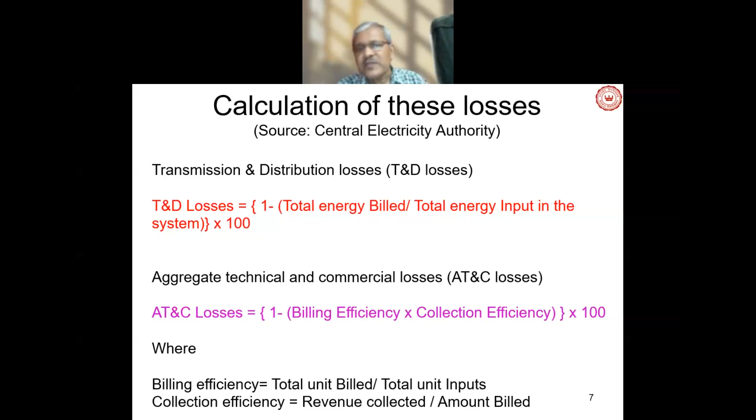That planning has to be done according to the industrial growth and many other issues over the 5-year plans. But interestingly, the source of power, fuel, is somewhere in the eastern part, southern part or central part, and the largest consumptions are in the western and northern part. You have to transport the fuel, and there lies another problem or difficulty.

Almost 45% of the overall freight movement of the Indian railway is due to coal transportation. So we are consuming some part of our own energy for the transport of energy itself. Is it not a fallacy? We have to accept it, because if our consumption point and generation point, or rather extraction point of coal, would be very close, that's a theoretical proposition. We academicians always go for good assumptions, but that may not be the reality.

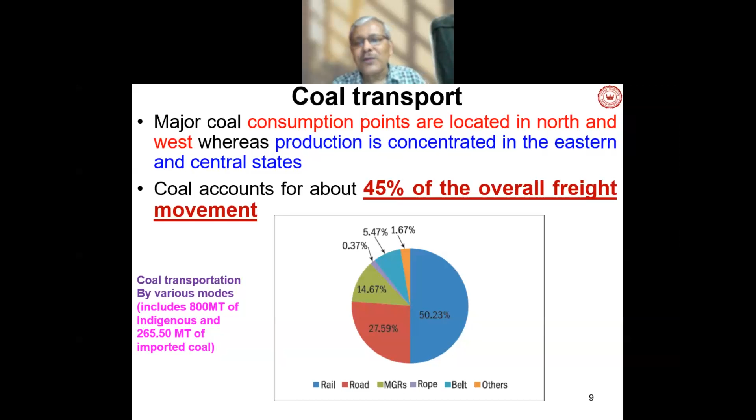Anyway, so we have to transport the fuel, meaning with respect to energy efficiency we're also losing it, but no option, because already installed large plants are on the western side. And that effect I will show in my published paper when I refer to the eastern part: though they are producing maximum resource fuel for power generation, they are the largest deficit with respect to power supply. Anyway, that's with respect to national planning and many other socio-political issues. I'm not going into those issues because those may be the research of socio-political scientists.

Then we have a bootstrap problem. We initially made our infrastructure towards coal-based power just because we had, or rather we have, large coal reserves. We are within the first 4 to 5 countries. Last time it was 4th, most probably currently it is the 5th largest country of coal reserve with respect to known coal reserve. So some more new mines may come up.

But interestingly, though we started our entire power sector dominated by coal, later on we found out that this coal is poor quality coal with respect to high ash content. So with respect to business, especially the private sector, they prefer better coal for better efficiency, for better profit, etc. So what happened? Then obviously people started importing coal. So we started just because we have large inventory, then we opted for importing.

That was not that much of a problem initially, but later on it was identified as a source of carbon emissions. We are being identified for imported coal also. The coal has been imported from Australia or Indonesia or South Africa, but the generation point of carbon dioxide will be responsible for the CO2 emission as per the climate change regulation. So we are emitting more carbon, not only from our own resources, but also from the imported coal.

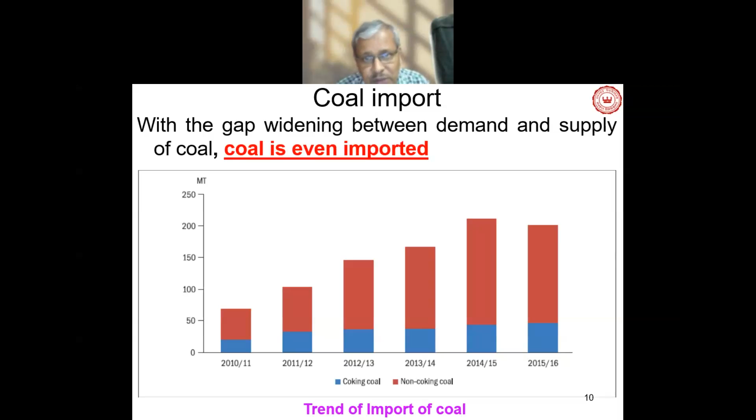Many people may argue that these data are to some extent synthetic in a sense. Unless we can reach the demand of the entire country, every person, we are still not providing electricity to everybody, though several projects or other policy planning has been met. I will refer to those also. So this data, whatever has been provided, is it the actual real data?

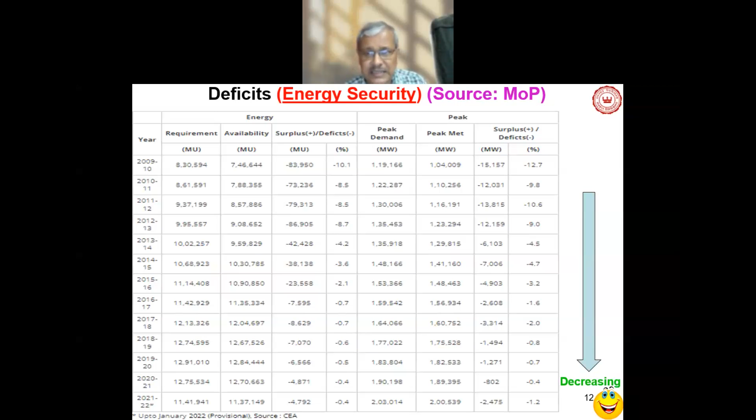I'm not going into that controversy, but I'm accepting it, as this is government published data, as a general tendency of decreasing deficiency, both with respect to peak load and the overall integrated energy deficiency. But interestingly, we have to note that this particular deficit, if your electricity connections increase, will really be much more than the declared one.

Now, government initiatives. Problems will always be there, and we have a general tendency to criticize the government because we are not getting anything, so the government is responsible. But the government has to take initiatives, which are very difficult to implement in a situation, but the government has to try. That's their responsibility. That's why they are in the government. So some of the government initiatives I'm referring to.

The Electricity Act in 2003 was a very remarkable development with respect to pure accounting of electricity consumption, and the Electricity Act in fact very clearly told about the unauthorized use of electricity, punishment, etc. And it also gave importance to rural electrification.

Rural electrification policy was adopted in 2006, though it committed provision of electricity to all households by 2009. Honestly speaking, in reality, it may not be the situation. Rajiv Gandhi Gramin Vidyutikaran Yojana, this was also to supply power to below poverty line households. We must admit these because these are the officially announced programs of the Government of India.

Then the remote village electrification program is another very important concept. India is quite lucky to have a wide variety of topography. We have Himalayan hills, we have a long coastal area, we have different other places, and we have the deserts. So everywhere the grid-based power may not be equally good or rather viable with respect to revenue generation.

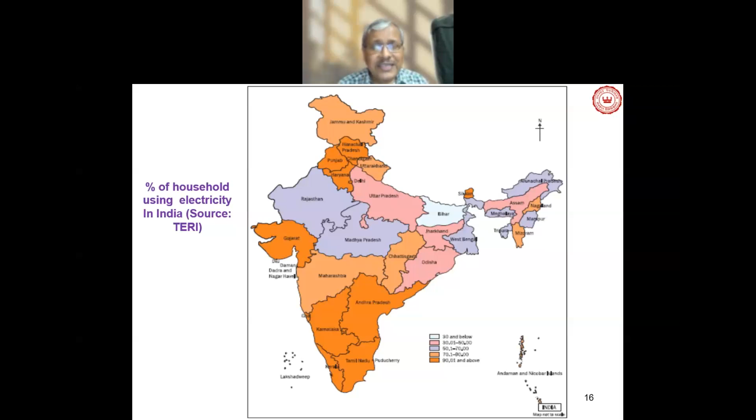So this is the scenario from census data: though a lot of initiatives have been taken, even 30% and below connections are there in some states like Bihar. And the better states are either in the southern part, or in the central part around the capital Delhi, and in Gujarat. So we have certain problems with power accessibility for all the population.

So I'm summing up whatever I have discussed about the policy issues. Large-scale power generation will be coal-based. Though my presentation title tells something different, I must admit there is no other option for the immediate future, even for a longer period. We have to compromise with our possible solutions in a realistic way. However, national policy also aims to provide electricity to villages, specifically to poor villages.

Let's see how it can be done. And for villages of India, my question is, not that it's an adopted policy of the government, whether small-scale decentralized power and other energy utilities using local resources would be suitable. What my proposition is, is something like this.

Whenever you are talking about coal-based power, coal is available in certain places only, in mines. And as I have shown in my previous slide, coal transportation becomes a big issue with respect to overall energy efficiency. So obviously, if we can explore local resources where power generation is possible, then we can meet the local demand with local resources, and the energy transportation issue will become minimal, or rather zero.

So my suggestion is, can we explore whether small-scale decentralized power and other energy utilities using local resources would be suitable? Let's see. Then another issue has come up at the international level, globally. Climate change has changed the entire aspect of human activities. Initially, people were suspicious whether climate change was a hoax or not. But now the entire world community accepts that it's a serious challenge. You have to address that. If not in the form of mitigation, we have to address it in the form of adaptation.

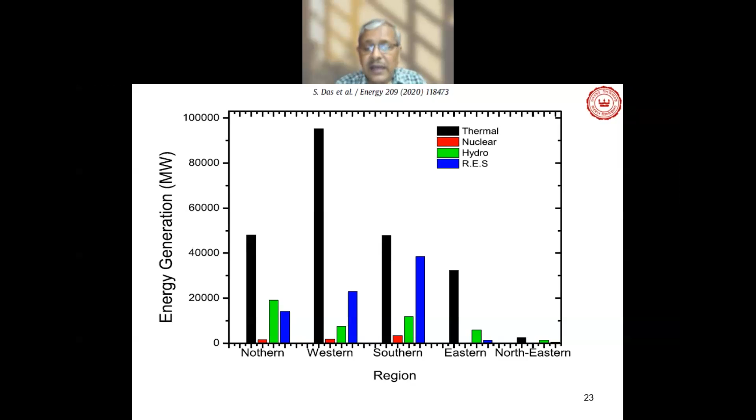Because grid power will not be feasible; it is already proved that maintaining grid supply in such high mountain terrain may not be practically feasible. What I got from the study is that in the northern, western, and southern regions, specifically the western part, electricity supply availability is much higher than in the northeastern region, where it is almost non-visible.

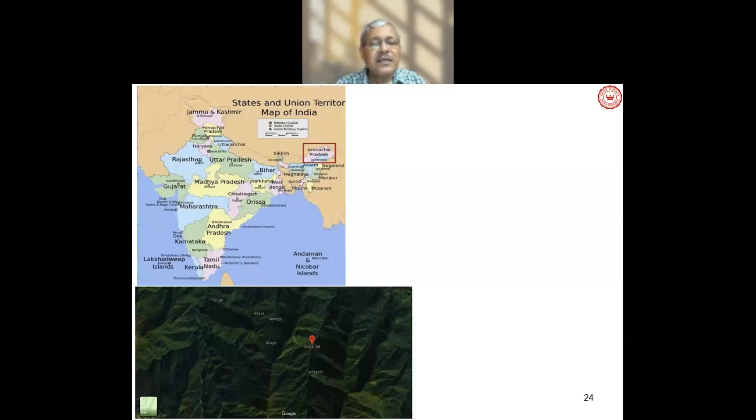So we have concentrated our study with respect to Arunachal Pradesh. The location is something like this. In fact, in our paper, the reviewer demanded a little bit of the geographical, physical view of that particular place. And this is a part of our paper.

And if this is the situation, how can the grid power be integrated for these areas? So our only option is if we can make something of distributed generation using the local resources. Now, what was the strategy? It was something like this. Let's assess the local demand. How much is the demand? In any electricity planning, even for large scale power generation, you have to have the assessment of the demand initially. Then we make the resource evaluation.

The resource evaluation, in fact, is not that important with respect to large coal-based power, because you can supply coal from your available reserves. But for distributed generation, matching these two is very much important. Then the selection of the equipment, available equipment matching local resources, is important. A single renewable resource would be, in a sense, easy to operate, but most vulnerable also, because if that resource goes, everything goes. For example, if it is a solar-based system, then battery capacity will determine the maximum possible availability of power. Similarly, a combination of renewable resources, which we call hybridization, is a good option.

But combination means which combination? Multiple options may be available. Here goes engineering optimization. So occasional diesel generator support may meet the load, as was checked. It is good, because generally people have a perception that we should not go for any fossil fuel based system. Don't be that much puritan, at least our experience says. If a fossil fuel based system is operated during 1% of the time to make the power supply uninterrupted, that's better than not using it and having an interrupted power supply.

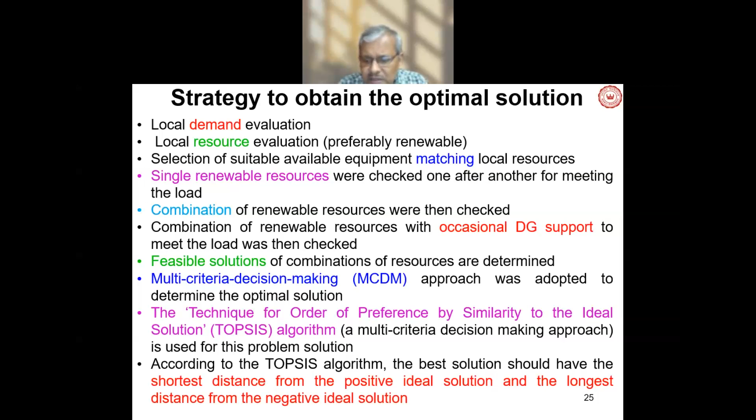Any optimization means you have to decide what optimization tool you will use. We use a multi-criteria decision-making system, and the TOPSIS algorithm of that MCDM system has been adopted. In the TOPSIS algorithm, the basic principle is the shortest and the longest distance, etc. I will not enter into those issues because that will complicate the situation for a mixed audience.

This was the structure for that location in the northeastern states. There are certain PV modules and a battery bank; they operate in a DC bus system, and there is an AC, alternating current, system also, with a diesel generator set, hydro module and wind module. Remember, this hydro module is the micro hydro module with respect to those streams that pass over the hills. It's not large scale hydropower. And then we have the electrical load we supply, and in between there must be a converter, DC to AC conversion. So our objective in this work was to meet the load at the lowest cost and minimum CO2 emission for the full life period. So we have to choose the suitable combinations out of this.

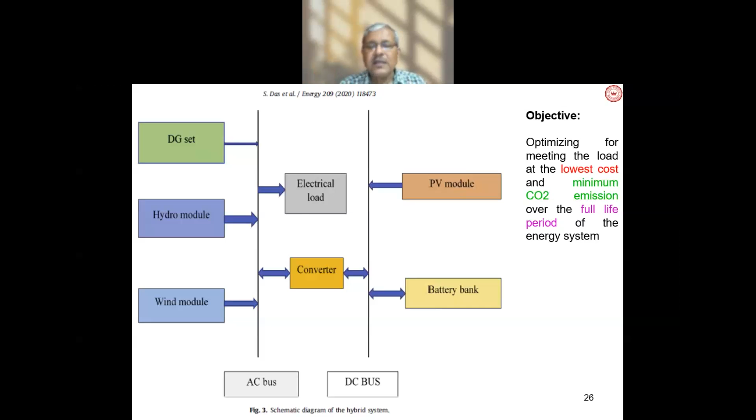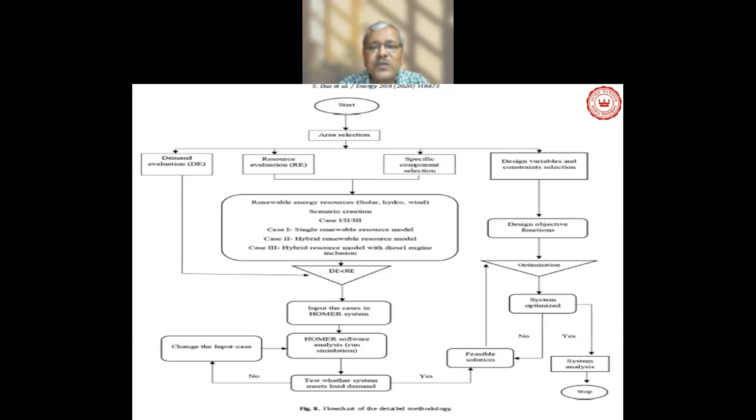Now in the result, I'm not going into the details. This is the logic or the algorithm of how we reached the solution. But the paper has been referred; those who are interested, specifically the students, can find it from my Google list. Anyway, I'm just showing the final result: the power share of the different modules is something like this in the optimized solution.

Almost 57% is from hydro, almost 41% is from wind, and only 1.94% is diesel generator supply. We recommended this as the best possible, or rather I should not call it best, the optimum possible solution. Because rather than giving interrupted power supply, it's better to push this almost 2% diesel generator based system, which is actually existing right now as a 100% system, and go for the other alternative hybridizations of renewable resources.

So cost share is interestingly not necessarily linearly related, because renewable technologies have a wide variety of methods of harvesting power. So what happens when you go for wind based technology? That costing is a little bit less than the hydro installation. So though 41.17% in the optimized solution came from wind, wind is taking lesser costing also, but these two may not always go together. That means if a certain power supply has the largest share, it may not always account for the maximum amount of investment or costing requirement.

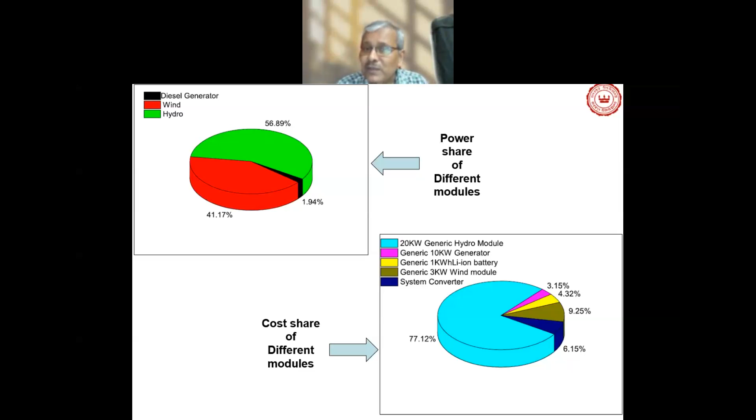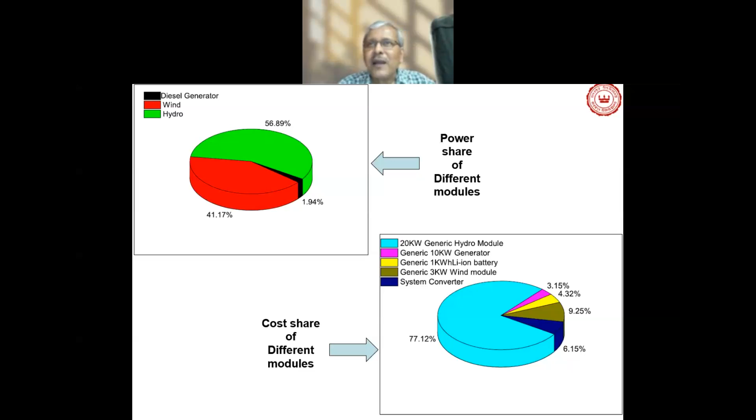There are very interesting challenges in renewable introduction. We are all looking for renewable energy, but renewable energies are much more variable issues rather than the central coal-based monolithic problem. I'm saying monolithic, and this is multidimensional. Because renewable itself is a widely varying thing, whether it is biomass, solar, wind or wave energy. Everything has its special significance, but they are clubbed together as renewable because they are virtually inexhaustible.

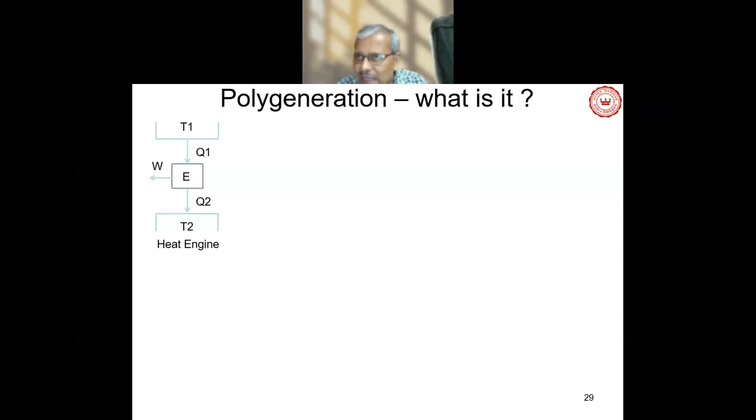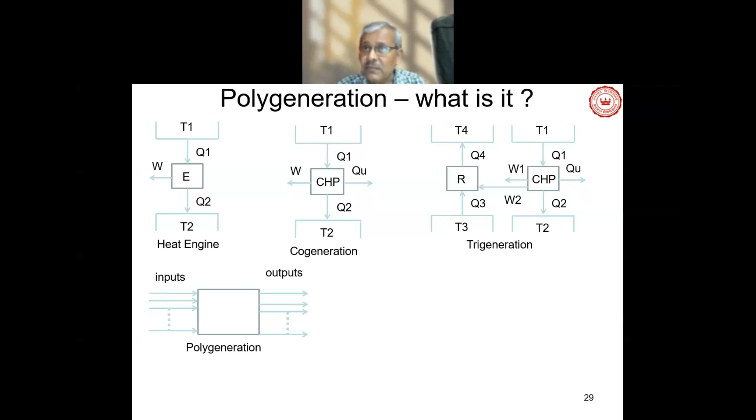Now I'm coming to a new concept which is called polygeneration. Mostly we are mechanical engineers in this audience, so we know heat engines thermodynamically. We know cogeneration, where the additional utility is utility heat. Then we know trigeneration, the next generation, where the heat-based refrigeration system is also used. Now, inputs will be given in a system to generate multiple outputs simultaneously. So here the greatest challenge is the system integration in an efficient way. And this makes the complex system, but undoubtedly this gives better efficiency and much better solutions meeting many challenges.

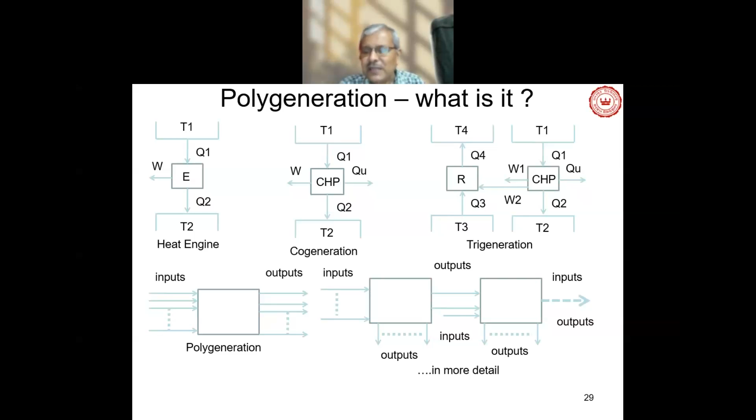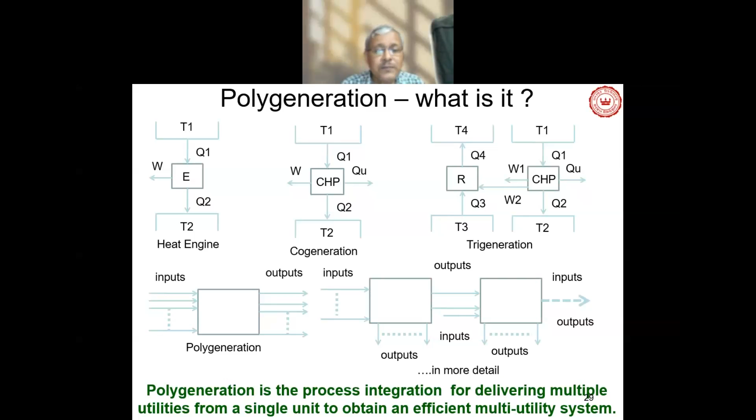It can even be a multi-stage polygeneration system where one block may have certain outputs and some outputs may be used internally for going into another level of polygeneration where outputs will again be of several types. So integrating many inputs and many outputs in a single integrated energy system is a difficult challenge, and that is most probably coming up in future, according to our experience, as a big solution for decentralized systems, which will be a multi-utility system efficiently integrated.

So why is it gaining significance? Obviously, it is efficient. Better utilization of natural resources can be made. Better production security, input flexibility, etc. But the challenge is mainly that the research needs are with respect to the identification of proper local needs and local resources. Because unless you have these two proper assessments, you cannot make a match. And any polygeneration system development is basically a site-specific solution and needs individual attention.

Because a coal-based power plant, when we were talking about the centralized development of coal-based power plants, can be done wherever. It can be uniformly applied everywhere. But for polygeneration development, the issue is you have to make an innovative solution based on the local resources available and also the local demand.

So we are just presenting only the title and this small result and conclusion, not the in-between method. This was one assessment done in West Bengal; as all of you know, Bardhaman district is famous for rice production. So agricultural waste has become a serious issue. Now, out of this rice production, if the agricultural waste, rice straw, can be utilized, we made a study.

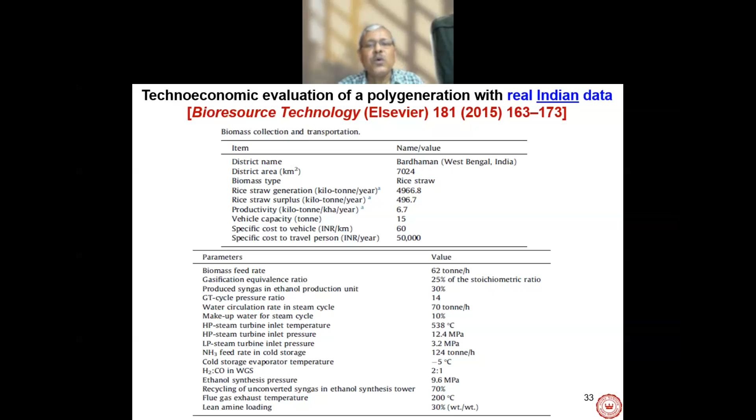It was published, but it's a theoretical study, no doubt. There are a lot of issues involved when you go for actual technology implementation. But this theoretical study has to be the starting point. And it's quite reliable, and the result shows that it's feasible. It's not a completely unfeasible situation. So we have estimated like this. And finally, we have taken care of all the process logistics.

The process logistics become very important when you want to make biomass-based systems. Because when it's a fossil fuel-based system, the calorific value is so high and it is extracted at a central point, so transportation of that fuel is enough. But in process logistics, biomass is actually a distributed generation system. Biomass is not available in a mine. It is available at different points of source. You have to collect them, process them, then use them.

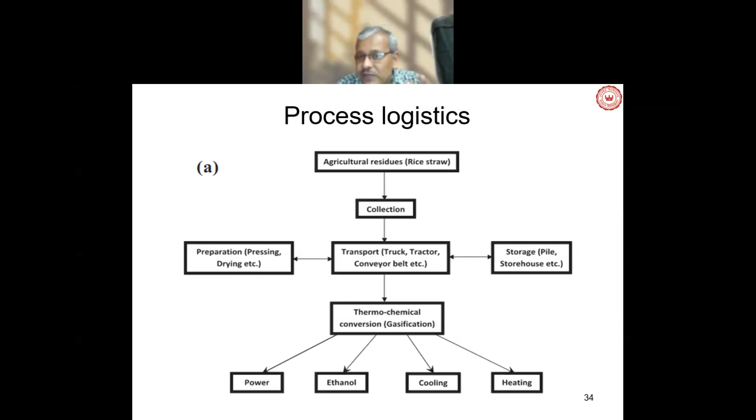So the process logistics has been taken care of, along with the thermochemical utilities. Why it is polygeneration: power, ethanol, cooling and heating. These four were the outputs of that system. Details are there in the published paper. So we have got an estimate of these values. We can have a net power output of 33.5 megawatt. The steam turbine power output is something like that.

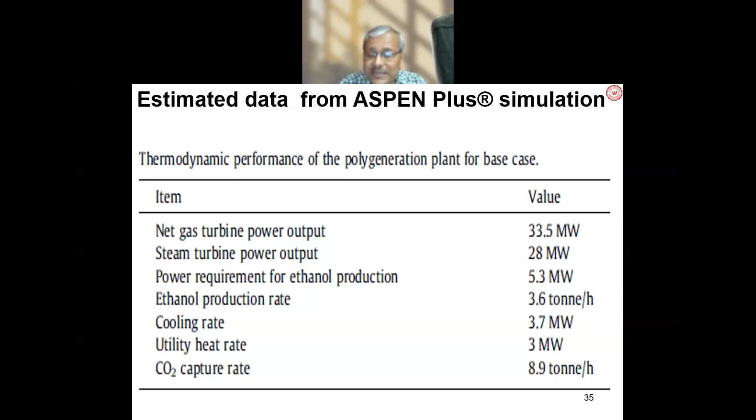We have got the ethanol production rate; it can be used for multiple purposes. It can even be used as a good fuel. Then the cooling rate is something like this. And the CO2 capture rate is also assessed. All the details are in the published paper. In another paper, we have tried to, I will not discuss this due to lack of time, but I'm just mentioning that techno-economic analysis is an important issue because, vis-a-vis the technical feasibility, unless the economic feasibility is there, the system is not acceptable.

On the viewpoint of that, that was also studied, and an off-grid Indian village has been studied for this. And then in the next step, what we have done is an important issue. You know, system feasibility is now considered with a lot of importance. During our student days, it was not that much important. Environmental feasibility. Now environmental feasibility has become a very important issue for any project approval.

And in that case, the indicator for environmental feasibility that is internationally accepted is the life cycle assessment, which takes care of the environmental impact from initial inception to after disposal. We call it from cradle to grave. So whatever impact that particular system has on the environment is assessed in an integrated way. There are different standard methods now. ISO 14040 is the particular document by which the environmental impact assessment can be done.

We have carried out the rigorous assessment and found out all the possible associated issues, acidification potential, climate change potential, and other issues also, and then found out the contributions of each in detail for that particular biomass-based system. And then we have found out the effectiveness of the polygeneration.

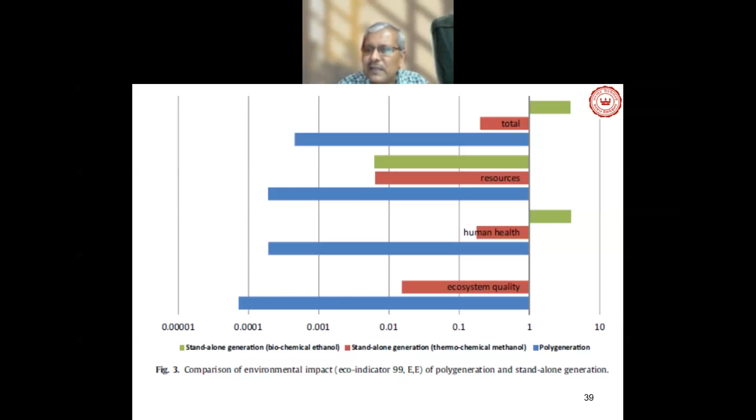Then there is another work. This is a very recent work, published only in 2022. India has got a long coastline, and you know that groundwater is a serious problem in India. So we are trying to get out of it. And some of the countries of the Middle East completely depend on desalination for their drinking water supply. In fact, desalination exploration has produced many solutions in different technological directions. Thermodynamic exergy analysis originally started from desalination.

Interestingly, with respect to India, we believe that within a few years desalination will be a critical issue, because we have got a lot of water, but that water has to be processed to make it fit for human consumption. So for a specific case of a small village in Tamil Nadu, we have tried to integrate the desalination process with the power.

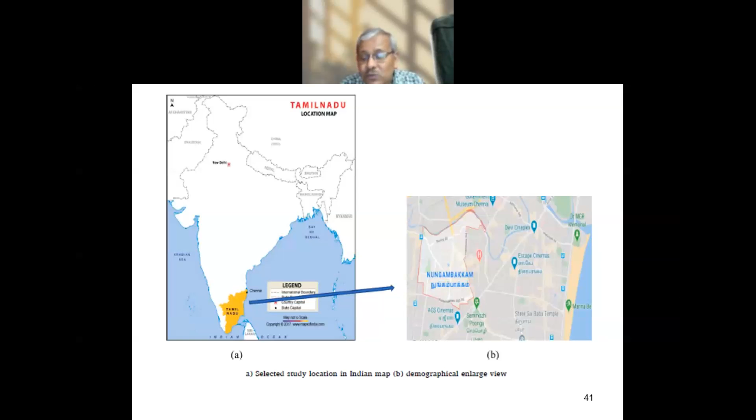It is like the Northeast situation, but here the demand or the need is different. There the demand was only power. Here not only power, there can be multiple demands; rather, heating can be integrated, which will be further work. But in the southern part, the demand is basically with respect to desalination requirement. So three possible desalination options have been chosen: reverse osmosis, multi-stage flash, and the multi-effect distillation process.

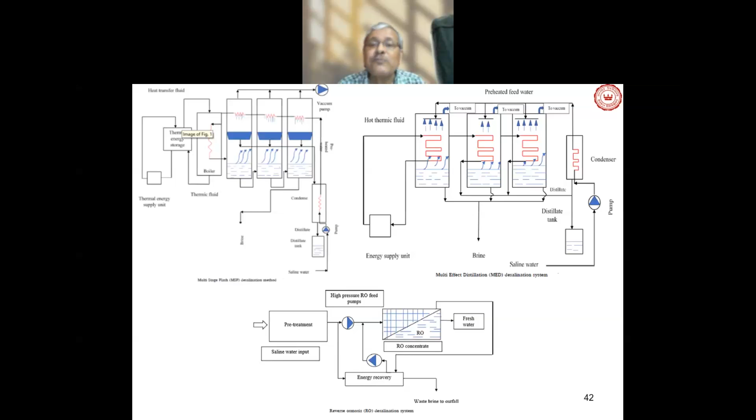We have tried to optimize, and resources also vary; here solar energy has been integrated. Note that in the previous Northeast studies, the Northeast is not a very suitable case for solar penetration; that's why most commercial companies are switching over to the western part for solar power generation. Nobody wishes to go to the Northeast. Solar insolation is not good there. But here in the southern part of India, in a district of Tamil Nadu, solar is a good solution. So the resource is most important in decentralized generation, to identify which is most suitable.

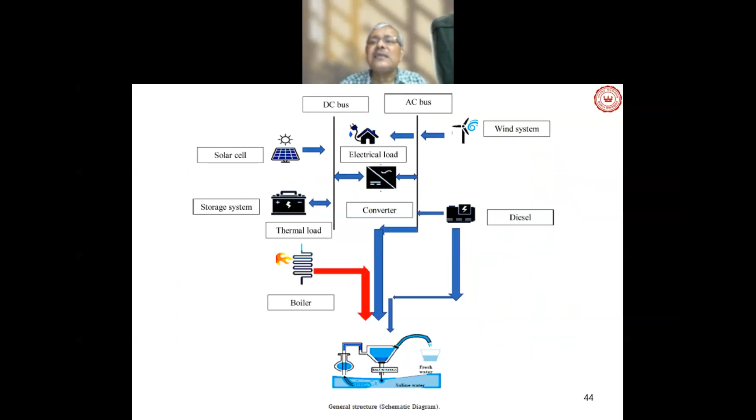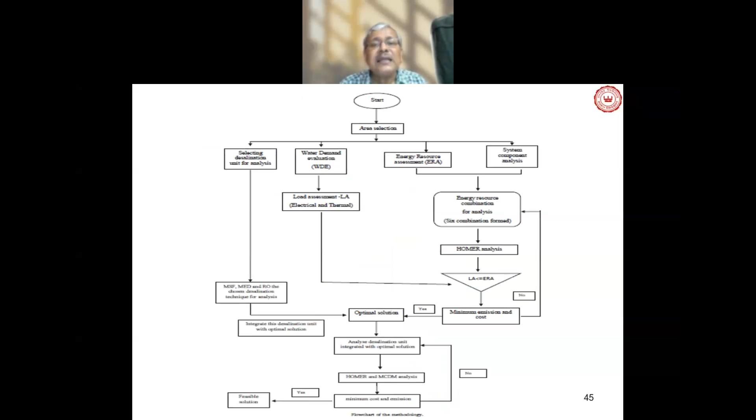And here the system is something like this, just like the previous case. We have wind energy, solar cells, storage systems, and a diesel generator is also supplying. So it becomes an integrated system like this, and we have made a comprehensive analysis, and then the desalination system has been integrated. And again, the algorithms are there in the paper, you can find them. And then optimization has also been done.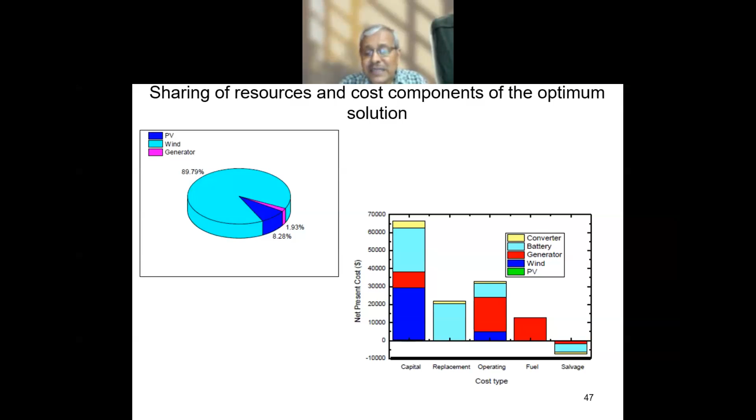And then identifying the corresponding demand and matching them is the interesting technological challenge. Finally, our review paper in a good journal, where we have proposed this, has been accepted. It's a comprehensive review as a future sustainable energy solution. That's the concept of polygeneration.

So in summary, large-scale power generation in India will continue to be grid-based, and it will be even larger in capacity. These names are not given by me. These are given by the Ministry of Power: super thermal power plant, mega, ultra super mega. These are the names given based on the megawatt capacity of Indian power plants.

But the national policies aim at rural electrification. Is it possible? Because whatever ultra super mega thermal power plants are built, they will not be feasible for supplying power at an affordable cost for rural electrification. And in addition, there are other mission programs of drinking water, smart systems, meaning smart energy, smart housing, smart city, etc. So integrating these things, my question is, can distributed generation or utility systems matching local needs and resources be a suitable option?

I'm not concluding. I'm just putting that question to the audience. So I'm not concluding anything. Now the house is open for questions and interactions. Thank you.